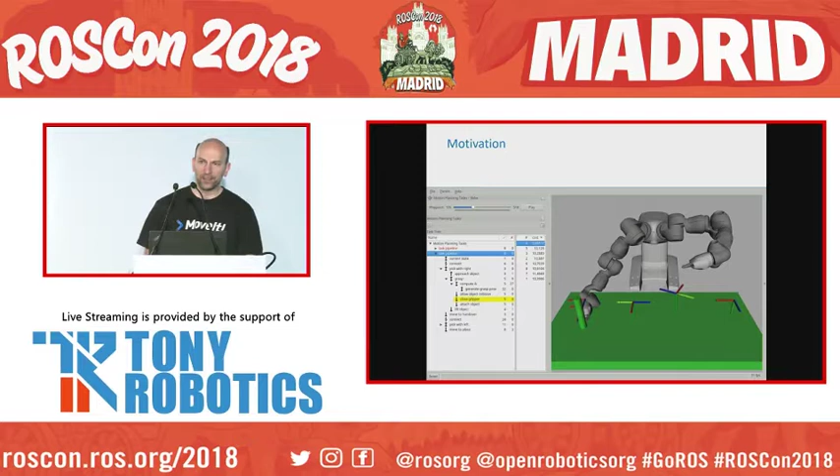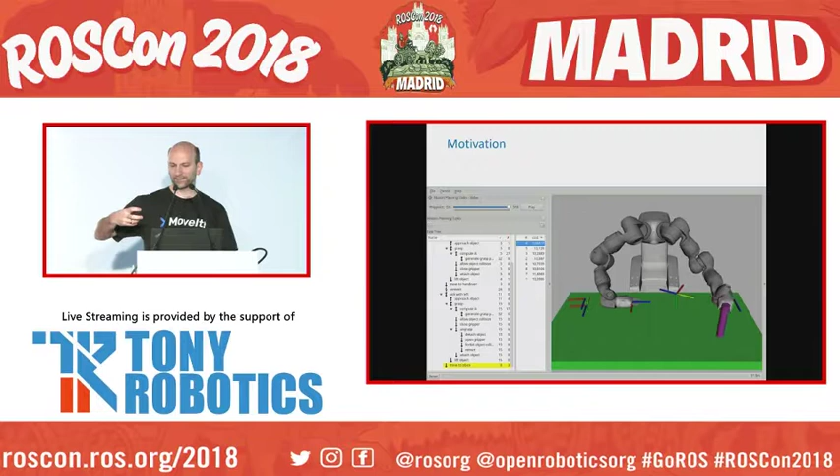What's our motivation? I guess we all agree that MoveIt does a quite good job planning basic trajectories from A to B. However, typically real-world tasks comprise several of these basic trajectories, and even worse, these trajectories are typically heavily interrelated. Consider this pick and place task with a handover in between: the initial grasp of the left hand heavily constrains the feasible grasp of the right hand in the handover phase. Up to now, there's no real framework available to plan such tasks.

Michael actually came up with the basic idea initially, and we fine-tuned that during the last year. We came up with a framework which allows you to easily define those tasks and then perform the planning. And of course, we want to be modular and easily customizable, so programmers should be able to add new stages, their own planning stages, to the framework.

My special interest is also to have multiple arms and multiple hands in there, because I'm coming from the domain of bimanual manipulation. And of course, you should be able to weight all your solutions according to customized cost functions in order to steer the search process towards the good solutions.

Finally, we actually want to replace the existing MoveIt planning pipeline or manipulation pipeline, which is rather limited. Actually, it can only support basic pick and place tasks, and there's no introspection at all. If something goes wrong, you have no idea why.

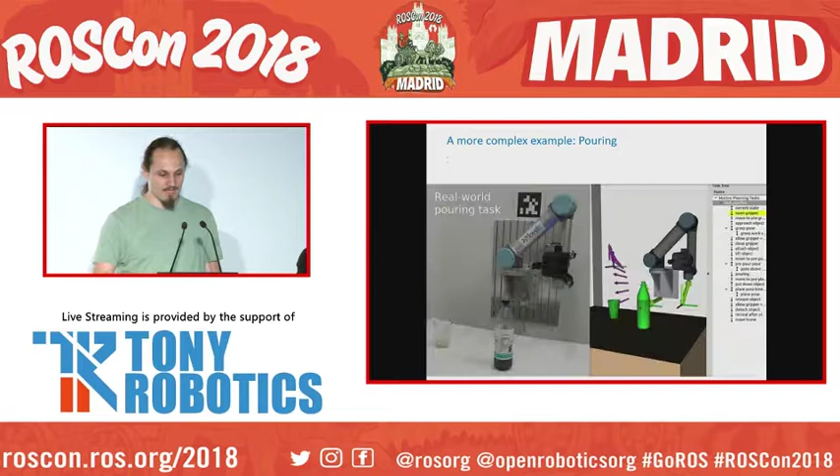You have a second generator that computes the motion going towards a glass that is somewhere in the environment. You compute a pouring trajectory, and afterwards you place the object back. So you can actually run this on the robot.

You get some nice illustration, especially for the pouring trajectory—you see the pouring motion in advance already. You can execute this on the robot.

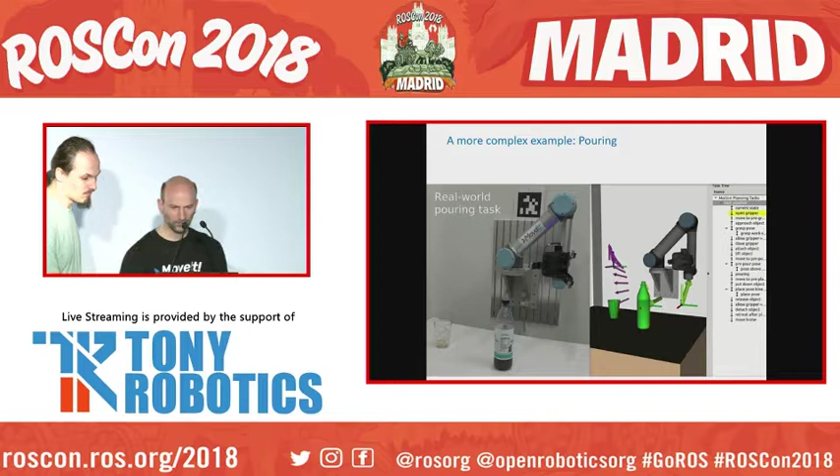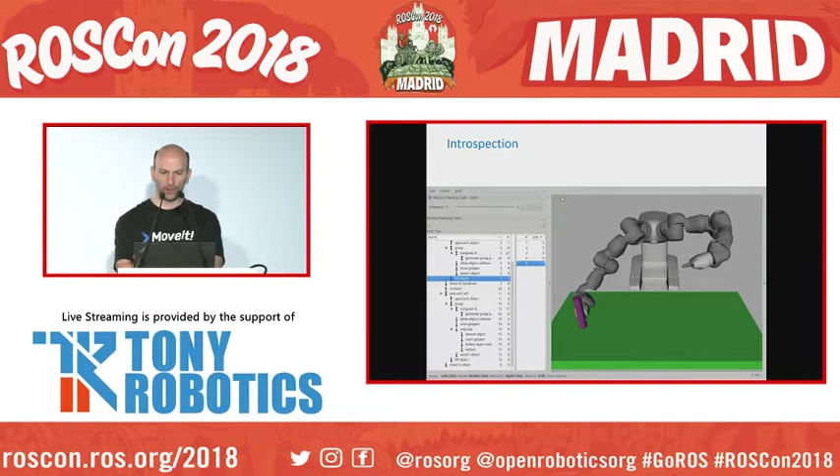A key feature of this manipulation framework is that you can also inspect if something goes wrong. You've already seen that we can visualize the final trajectory together with all the markers the user attached to its solutions. But we can also, here in the RViz plugin, navigate all the solutions and look at the failed ones and see what actually goes wrong.

This framework is still a lot of work in progress, so we have several features on our list which we still need to implement. First of all, we want to replace the existing pick-and-place capability.

There's also work going on extending the existing RViz GUI so that you can configure your task interactively there, and then maybe save and load from YAML or directly generate your C++ or Python code.

We have some ideas on execution handling. Currently you take your final solution and pass it over to execution, but there might be options where you can already take a partial solution, an initial partial solution, and already execute it because, for example, it's the only solution you found for this initial part.

Or you don't care and simply want to proceed fast forward and pass already this partial solution for execution. That, of course, then constrains the subset of solutions you should consider for further planning, and so forth.

One important step is, of course, scheduling, which is not yet finally done. We have some priority queues which allow for sorting your solutions according to cost. However, what is not yet done is actually the stage scheduling.

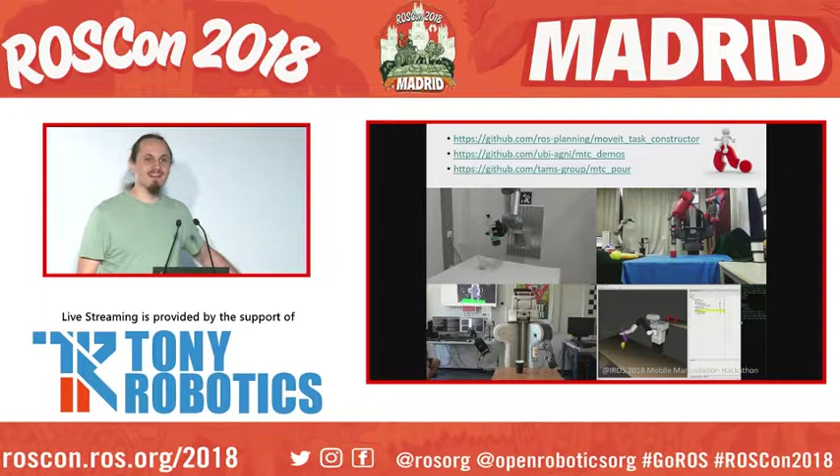If you want to see the thing live in action, you might want to have a look at the Mobile Manipulation Hackathon at IROS next week. We present a Tiago-based bartender setup there, which is in the lower right, and you might actually see it working in action, assuming it works. Thank you.

All right, if there's one quick question from the audience—I've got one for you. If someone from the community has created a custom stage, how would be the best way for them to notify you of this or other community members?

So, assuming it's relevant for everyone: pull requests, or just open source your custom packages. We have a plugin interface. Great, thanks a lot.